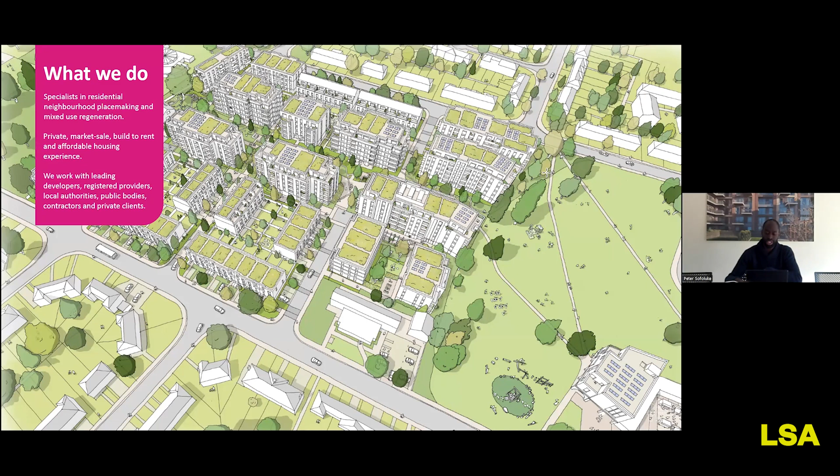As I mentioned, we specialise in residential schemes of all scales, working with client bases which range from developers to local authorities. So without further ado, I'll move on to Southgate Office Village, which is in Southgate - if you don't know, that's in North London on the edge of the city.

Southgate Office Village is this site here, which bounds the Southgate Circus Conservation area, which is centred around Southgate Station.

It was designed by Charles Holden, who has designed a number of tube stations along the network, and that station pretty much sets the conservation area. So the site as it is now is made up of

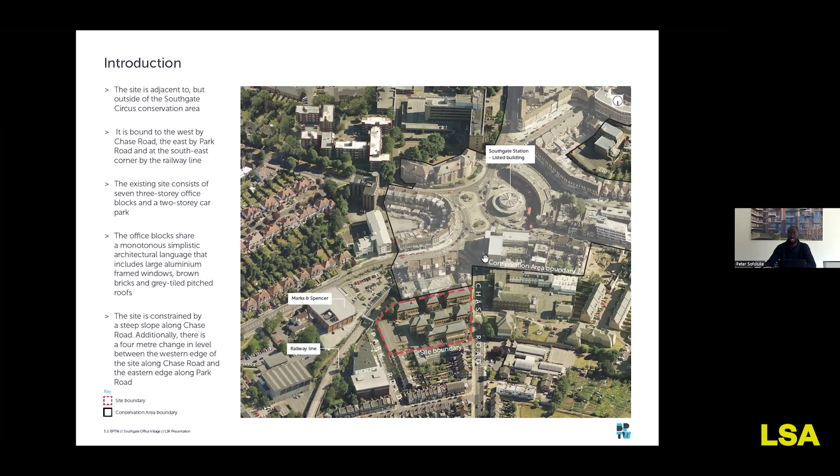1960s office blocks with a kind of raised car park along this edge here. Chase Road, which leads towards the station, is a very steep road. There's a four metre level change across the site from east to west, but north to south we're looking at a much more significant level change.

And then it's bound to the east here by the railway line. So just for context, the bottom of the screen here is south, and north is up here.

So again, just picking up on the historical aspect of the area - you've got the listed station here by Charles Holden, with pylons flanking the station, and a parade of commercial units that completes this setting.

Looking at historical maps, the urban grain of Southgate Office Village hadn't changed materially, but the site has always been set outside of the conservation area.

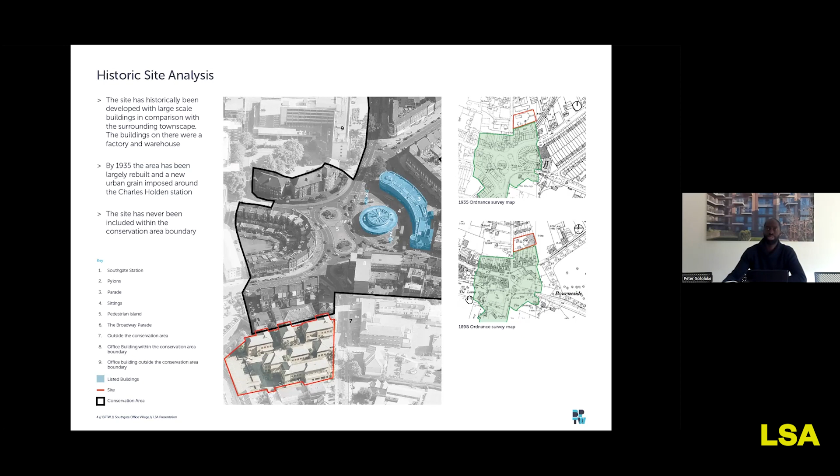Looking at the area in a bit more detailed land use, so around the station, it's predominantly retail and commercial, and then as you move further away from the station, you have residential homes, and the scale begins to lower. You have 4 or 5, 6-story buildings located quite close to the centre.

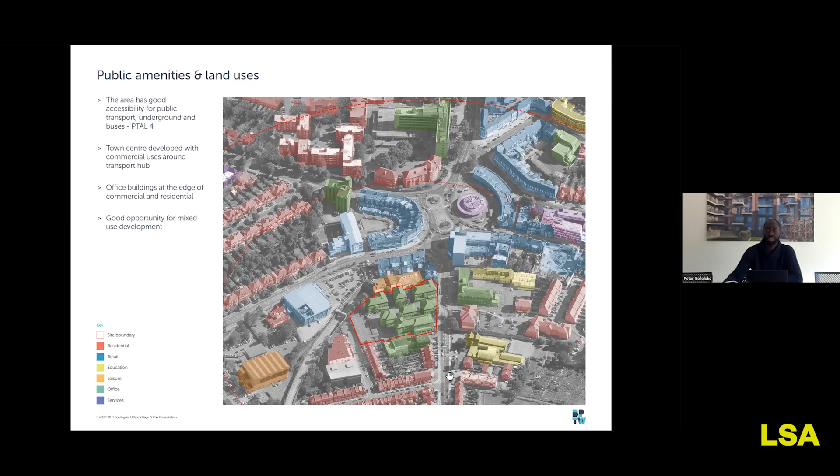But then as you move away, that begins to reduce down to 2 stories. So a key challenge for us was the interface with these two-story homes north of the site. Now looking at the site, there was currently no east to west connectivity across the site. So these diagrams show Chase Road here, with the station up here, the railway line flanks here. We felt that this east to west connection was a really important initial consideration, which then determined these two urban forms.

Given the sensitivity to the north of the site, this block here was carefully sculpted to push and pull, reducing the mass to minimise impact on the homes to the north. And then the block to the south, we felt to break this up to allow light into this central space, and again just to soften the impact.

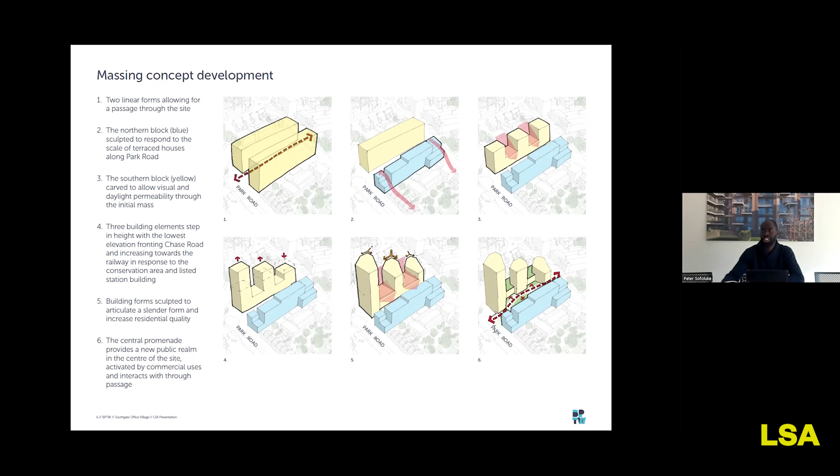Finally, there was a series of landscape spaces, whether hard or soft landscape. So a resident podium sat, linking the taller elements, with then a hard landscape promenade, which created this new east to west link through the site. As I mentioned, that is a link that's not otherwise possible.

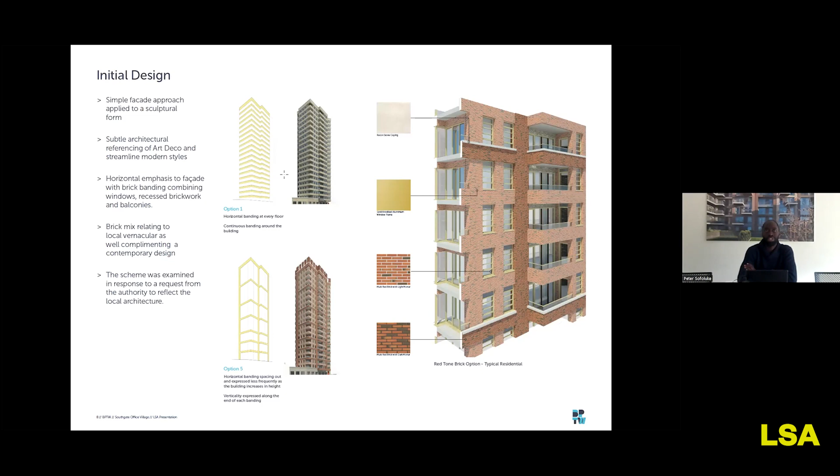So the initial design and development for the scheme took an art deco approach, and this was something that had been discussed with the local planners. They felt a contextual reflection was appropriate, and that led to a horizontal articulation. As this scheme developed, it was red brick, and that then translated to an initial proposal that went to pre-app.

Now this scheme didn't really receive the support from the planners, and at BPTW we had an internal design review to reflect on the positives and negatives of the scheme, and it was decided that internally it would move teams, and that's when it moved over to my team and the partner Chris Bath to take a fresh look at it.

The big feedback from the planners at this stage, and it did go to public consultation, was that the scheme felt quite bulky, although those initial concept diagrams were supported. The execution felt too incongruous with the site.

So we looked at it to make these towers a lot more slender. That was a very important move. So the outline that's shaded in yellow, that's the original scheme. The black outline here shows how we've adapted that massing. We reduced the height of the tallest tower from 22 story down to 17, and then gave a bit more mass to the element that fronted onto Chase Road.

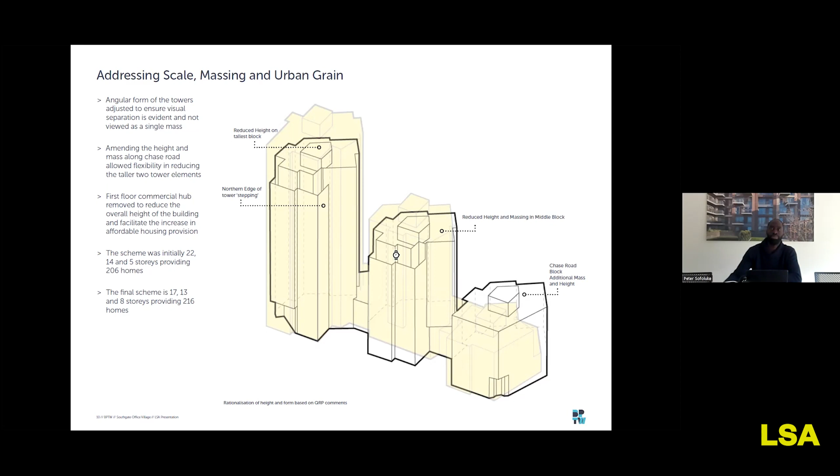Another key move was just to look at the form to unify, particularly these taller two towers, to be exactly the same footprint and form. Now, given that the Art Deco influence, which is very prominent around central Southgate, was very well supported, we looked around the site to see how those buildings had been reflected, and actually, when you look at it, the vertical emphasis is very prominent.

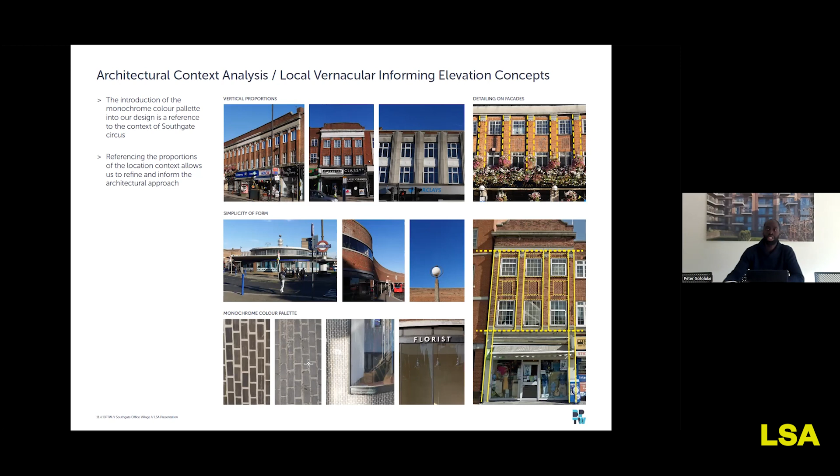We then looked at materials like glazed brick tiles, and there were also a number of dark brick materials. So we took that and came up with a two-tone approach for the towers. These two tones helped to reduce the visual appearance, so that it's not just seen as one mass. Even though a tower was one form, it would then be viewed as two slender elements. And then we picked up this fluted stonework, which we integrated into the design to again express the verticality of the scheme.

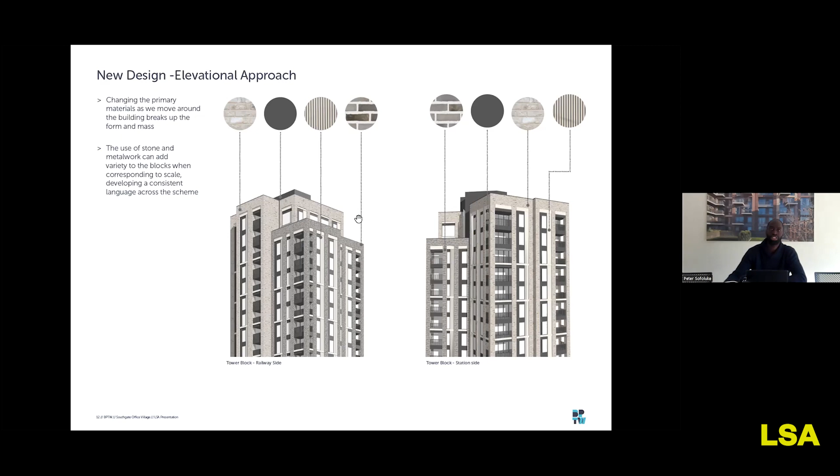That was another change from the previous scheme, which had a horizontal reference. So here's a view of the scheme, and I think you can see that it does appear a lot more slender. I think the two-tone brickwork really helped to achieve that. And then just looking at the plans, at ground floor level it's predominantly occupied by commercial spaces.

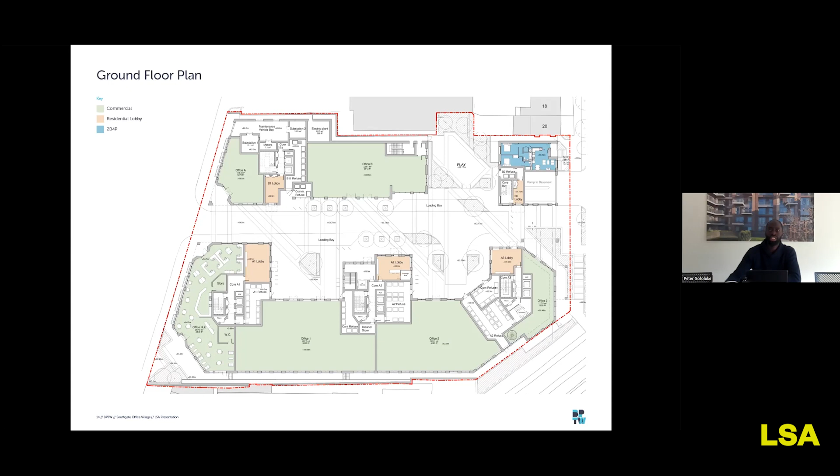The commercial spaces on site were felt to still be needed at Southgate, and the lower levels helped to really activate this central promenade, with a number of commercial spaces fronting onto that space. We were also very careful to ensure the residential entrance lobbies were situated facing onto this central promenade, so there's as much active frontage from east to west as possible.

Now onto Chase Road, the main road here. There's also a cafe and an office hub, which really activates this corner of the site.

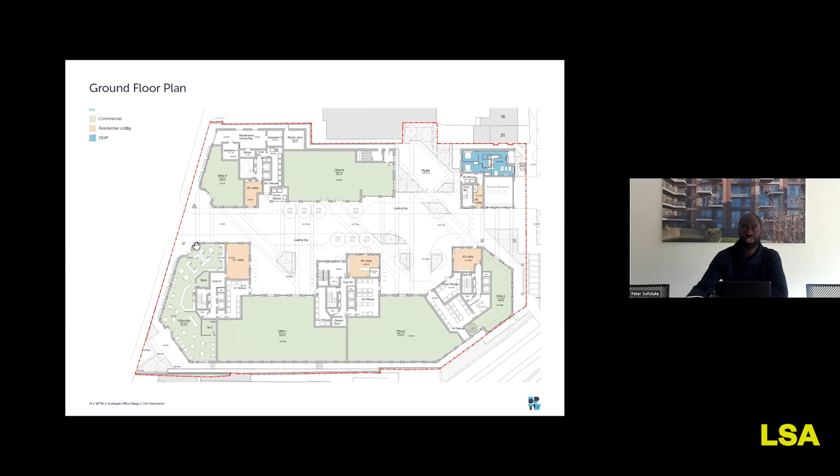This is a view of the central promenade, looking east to west towards Chase Road, and you can see the towers here. This is the short linear block with a series of office spaces fronting onto this central promenade.

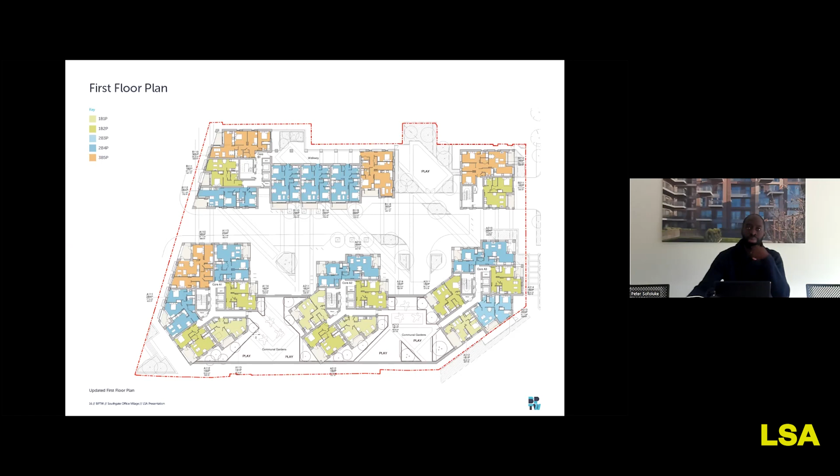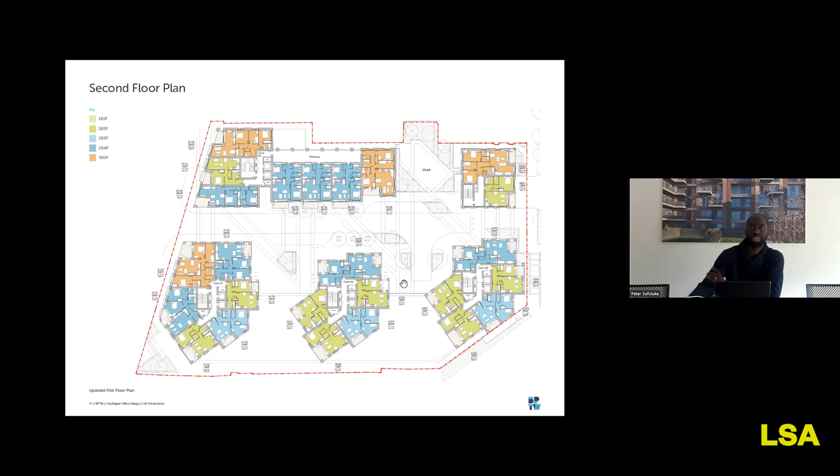This is a typical floor as you move up the building? At first floor level there's a series of pocket podium spaces which are shared between the towers. Moving up, those towers split, and the form of these two towers has been carefully sculpted with a lot of setbacks, pushing and pulling, to consider all of the views around Southgate. You will always see the gaps between the towers.

This is a view looking from north to south down Chase Road. You can see the quite significant level change across the site.

And from Southgate Station, again a lighter tone of brickwork helps to articulate these buildings to merge into the townscape.

Overall, the scheme provided 216 homes, of which over 30% was affordable. The GLA policy was 35%, so slightly below that. 10% wheelchair homes in line with policy, plus a significant proportion of commercial and new office space.

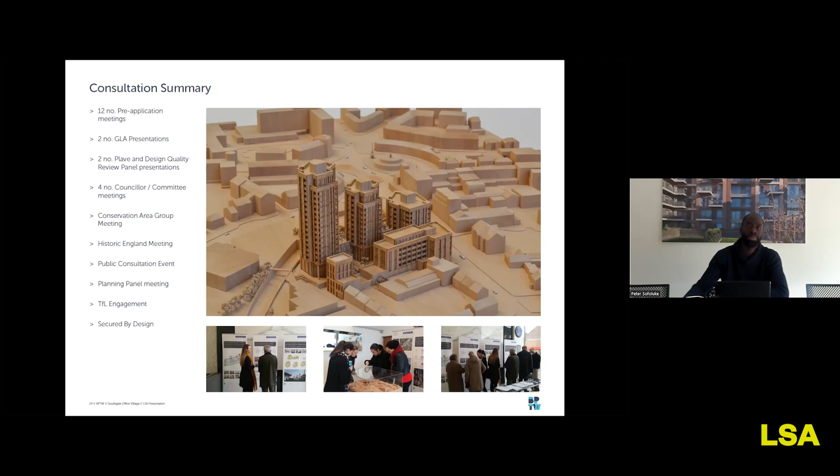Other stakeholder engagement - as you can see, a lot of support was received from highways, Thames Water, the fire brigade, a design review panel, the police, and the Greater London Authority.

When the scheme went to planning committee, the planning officers recommended the scheme for approval. I think the 2.5-year consultation period was that long because we intentionally wanted to reach a position where the planners were supporting it going into committee, and that's where we stood.

At this point in time, the local community had come together. They'd formed a group against this scheme, and the main concern was the height. But the local plan for Enfield had identified this site as a site for transformative and significant change, so policy had effectively given our team the confidence that this site could and should accommodate a scheme that will effectively transform the area.